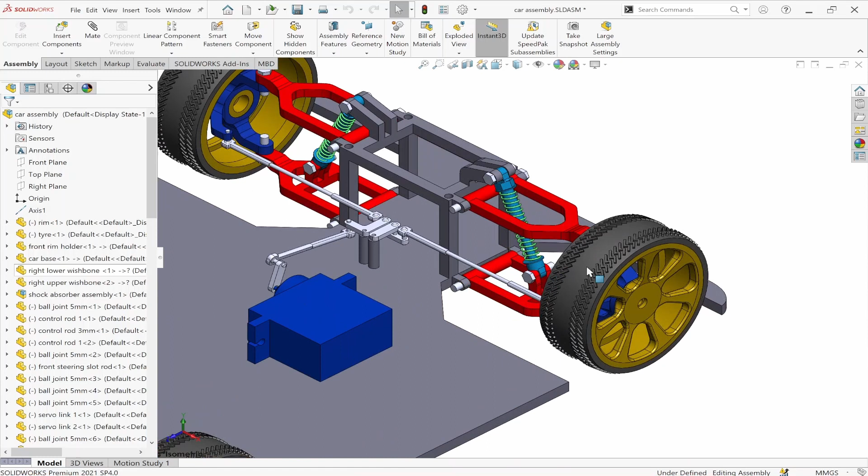In the previous video I showed how to make the tire, the rim, and the front rim holder. Let me click this part, which I can find on the left side. I will select all the parts using this tool, then Ctrl-click this one, right click, and hide all other parts.

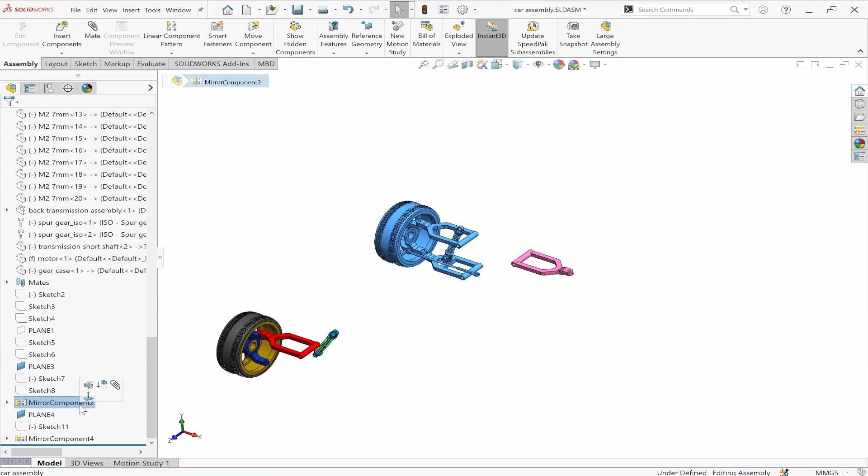Let me go one more time. Right upper wishbone, right click, hide component. Okay, so these are some mirror components. Let it be—we'll look at the geometry of this one.

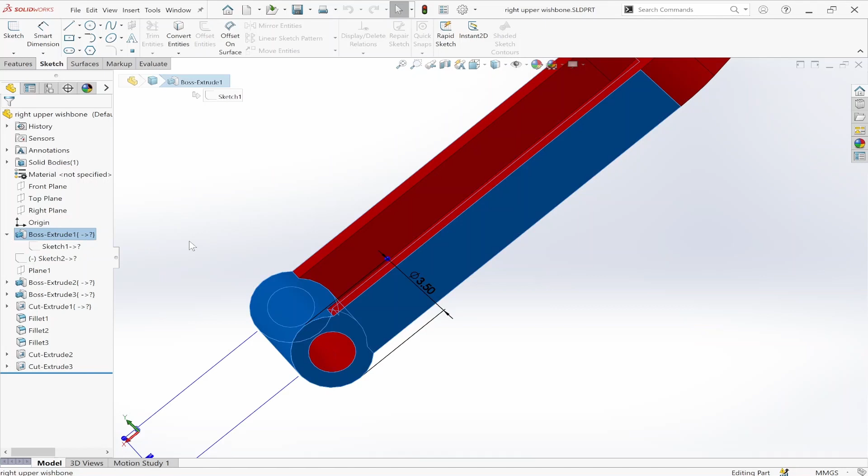I will open this part. As you can see, the first part is the sketch, made 3.5 millimeters, then boss extruded with 16 millimeters. Then I made a reference sketch again of the height I wanted, because from the bottom I wanted to check how it would look when attached to the front rim holder.

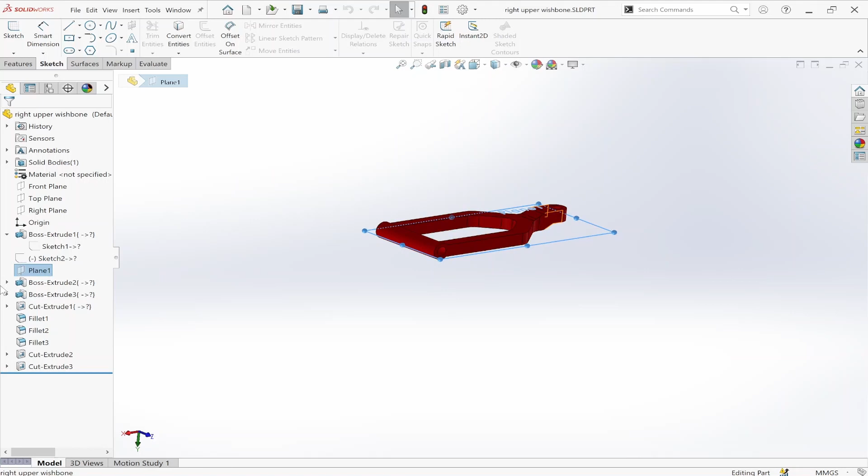And then I created a plane because I wanted to make the boss extrude for the skeleton. You can see I drew the sketch in this one.

Let's go to the sketch. You can see this is the sketch and these are the dimensions. I made a rectangle and then added an offset, how much offset I wanted—the offset is 2.5 millimeters.

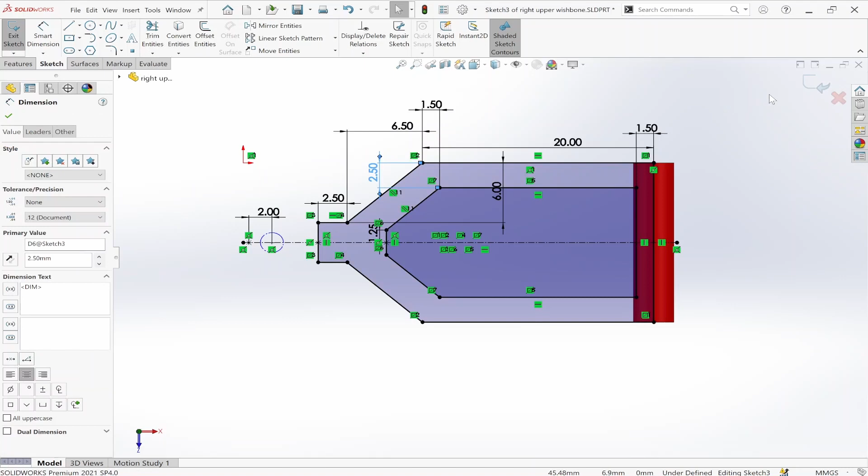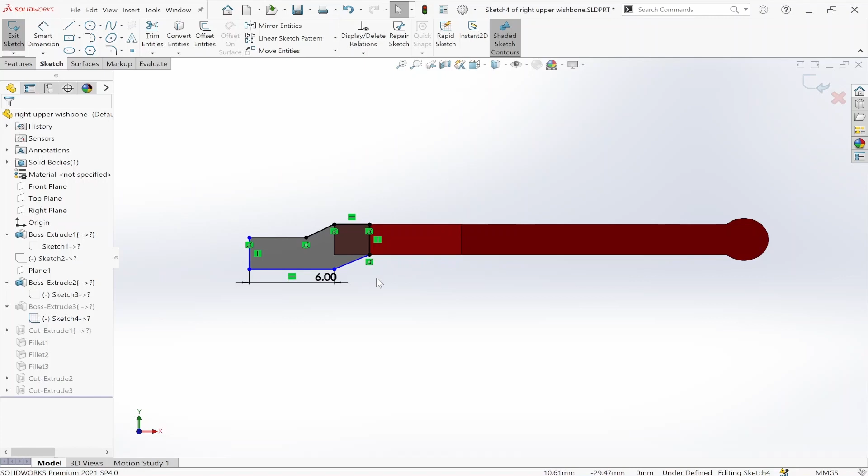Then I made another sketch, trying to merge this line with the front rim holder, because as I told you, we can make the assembly in two different aspects. So using the reference from the front rim holder, I tried to get the coincident point in the front rim holder, and then boss extruded it.

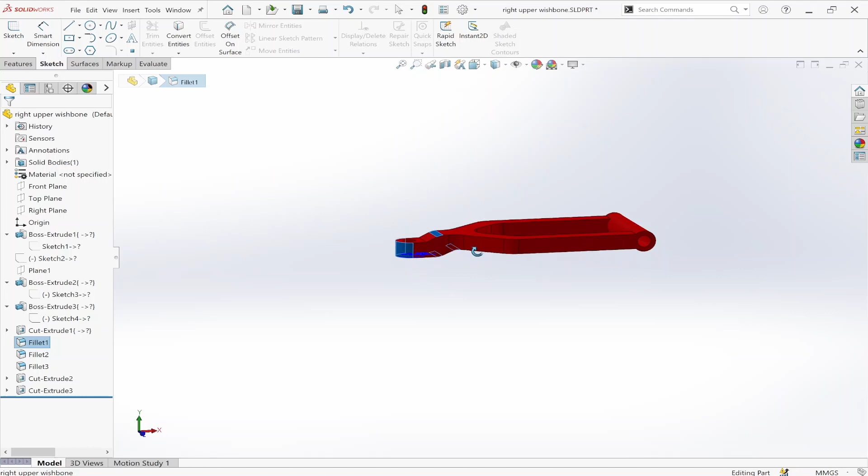Then I added some cut extrude because here I will add M2 screws, and then I made some fillets to make the shape look better. And then again the cut extrude—you can see it here, with 2 millimeters.

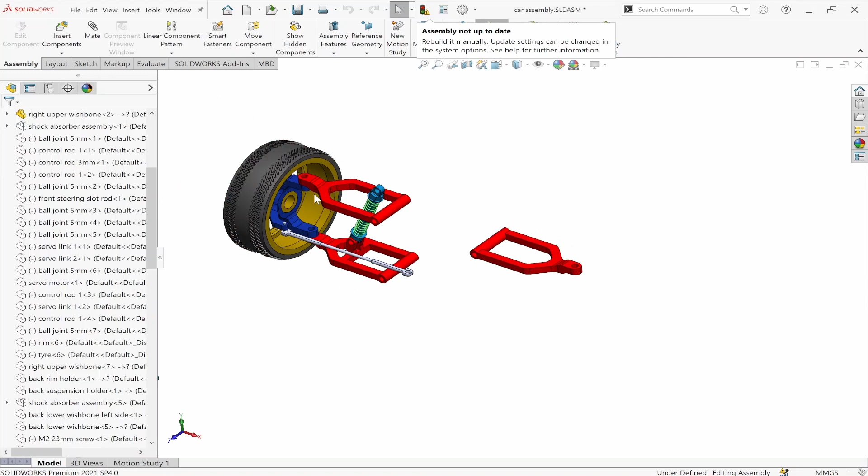Okay, so again I press Ctrl+S and go to the assembly. I don't want to change it. If you see here, this is what I was trying to tell you—this part has to get some inclination so as to properly align in the hole of this M2 screw hole.

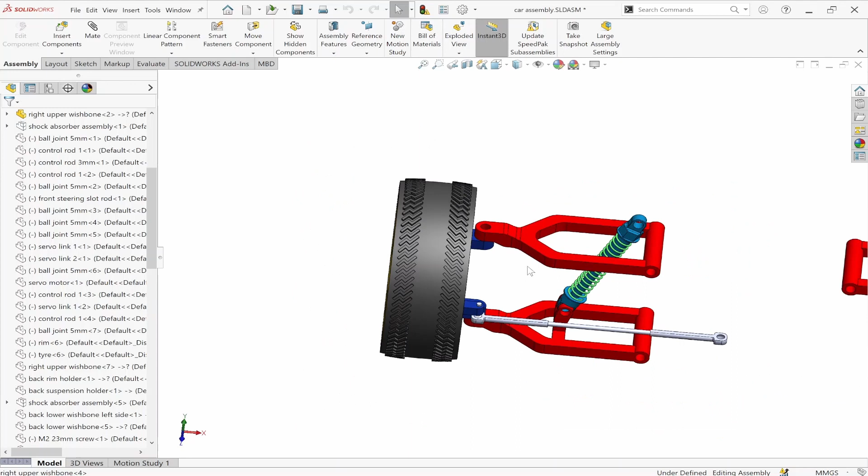So that's about our top front wishbone, and now let's get to the bottom front wishbone. I will hide this part. Let me show all the parts, then I will gradually close everything.

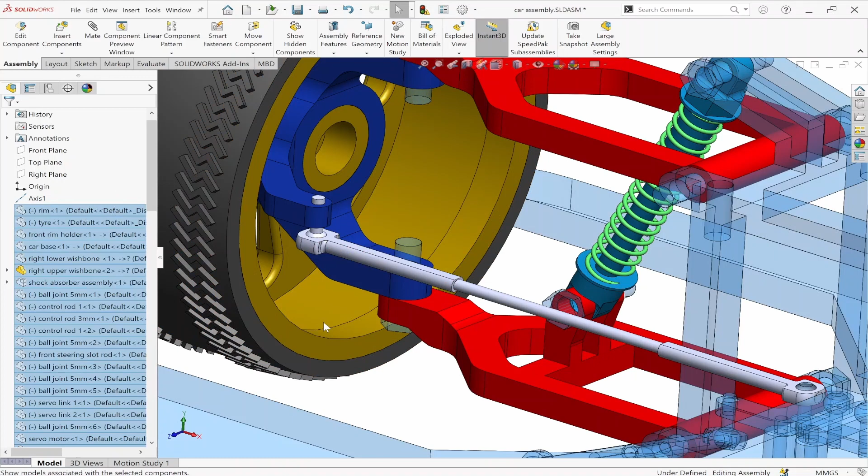Show components—I'm trying to show all the components because the parts I designed are on the right side, so I just mirrored it. The parts which are symmetrical, like the wishbones and the tires, are exactly symmetrical, so I just mirrored this component to the left side.

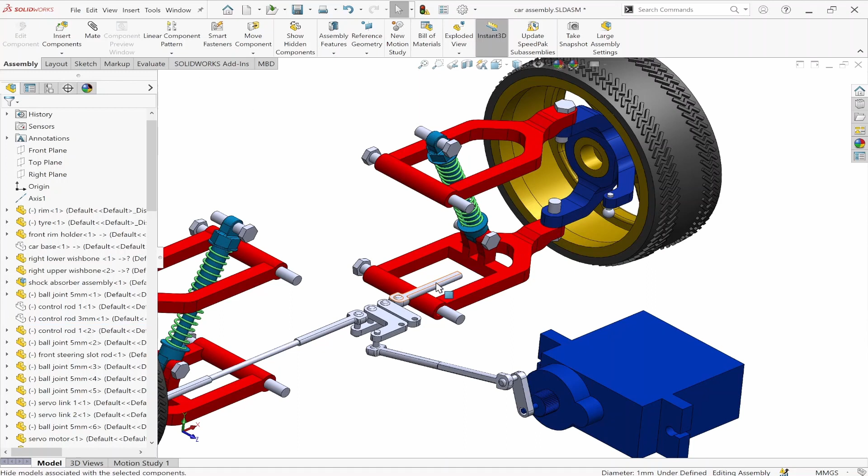I will hide this part. I will hide this part too—I'm just trying to hide these so we can see more clearly how the parts are made. So quickly, what I did: I tried to mirror the component.

I mean, I just tried to copy the component—sorry, not mirror, copy the component—and then I changed the name from right upper wishbone to right lower wishbone. Now if I edit this part, as you can see...

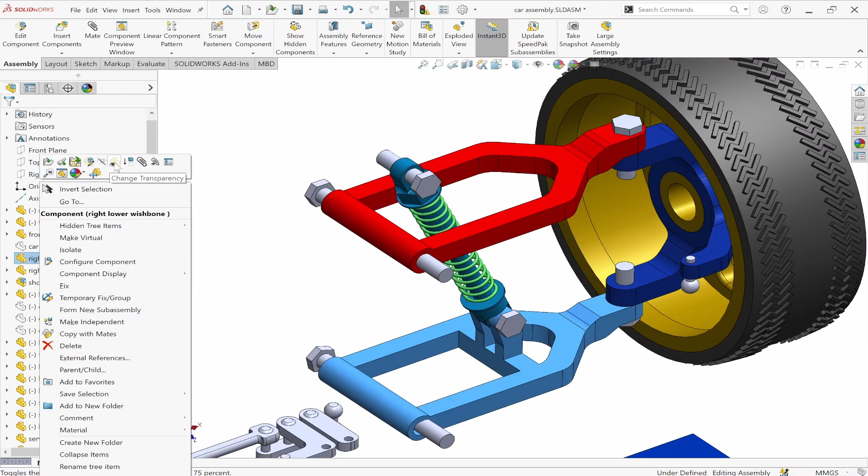Because we have 2 holes here and 2 holes here, we need to insert a bar which will connect the shock absorber spring, which is not present in the top wishbone. So I tried to make a geometry for this—this is the one I was telling you about.

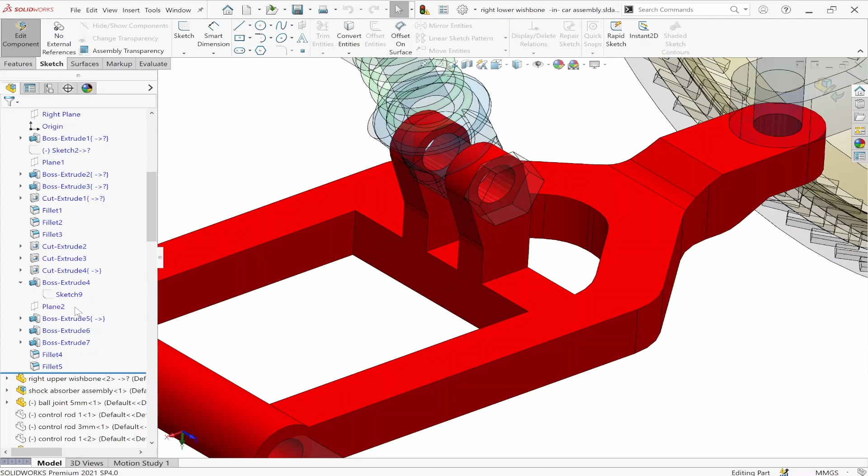I added a 2.5 millimeter square and then boss extruded until the blue face, then created a center plane. If we want to make a plane, we select this face and this face, and click reference plane to get the center plane exactly halfway between the two faces.

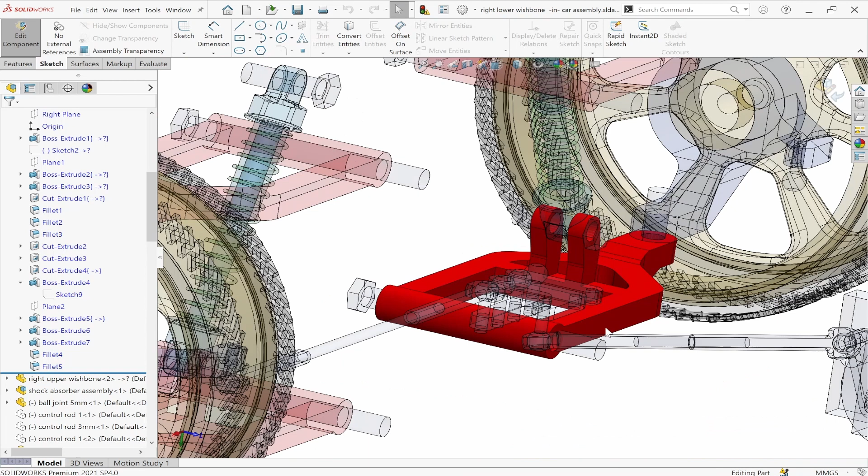Then I tried to make this sketch. You can see I made these two sketches using 1.5 millimeters of thickness, and the boss extrusion is around here. The next boss extrude uses this sketch.

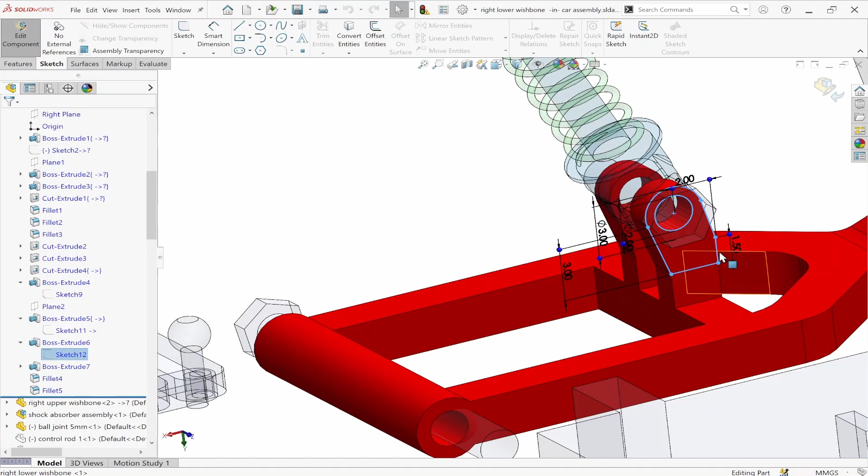I tried to make the sketch on this face, and then extruded up to a thickness of 1.5 millimeters, because this is the hole where we will put the M2 screws to fit the shock absorber.

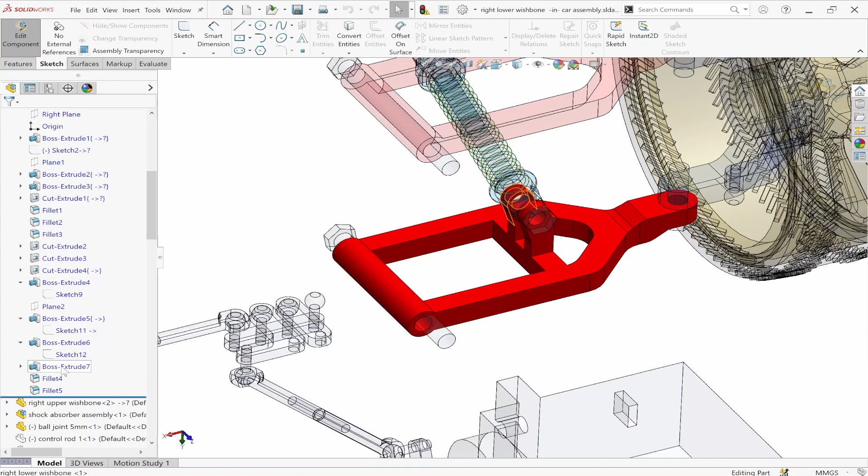Then I made another boss extrude here—I could have used a mirror, but I used convert entities and boss extruded here instead. Then I added some fillets here and here. That's all—this looked pretty simple, and now we are ready with the top wishbone and the bottom wishbone.

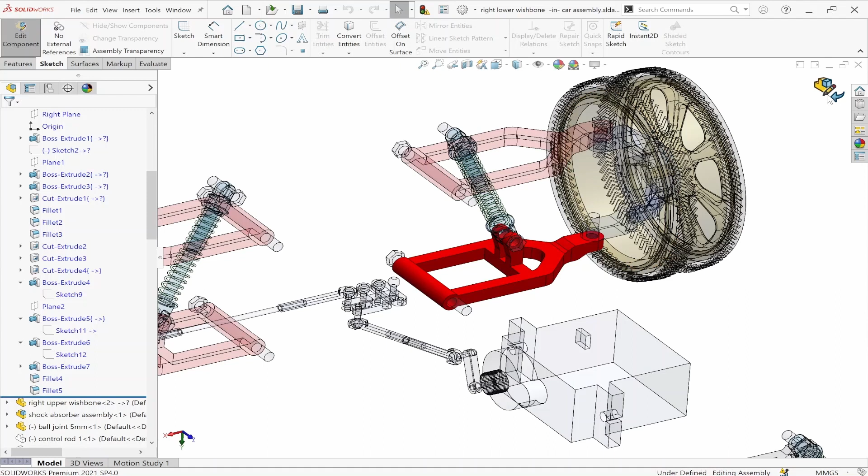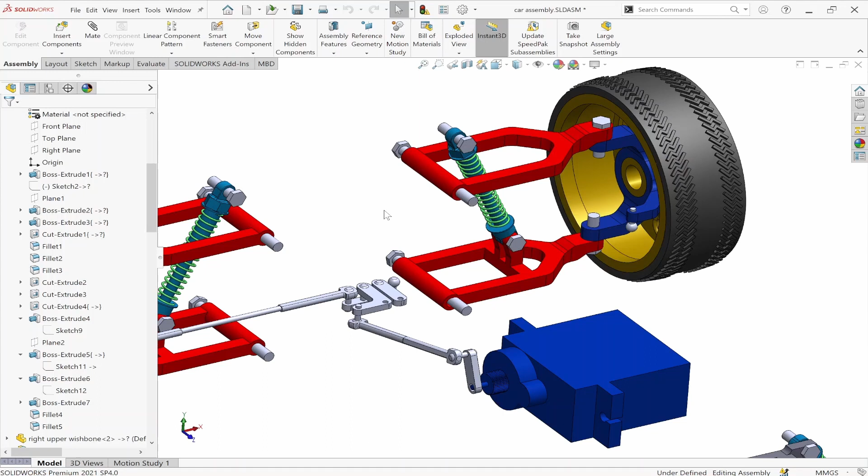So far what we have done is to make the tire, the rim, the front rim holder, and then the top wishbone and the bottom wishbone. This looked pretty simple. By this itself you can easily understand that we are getting into some action, and we can do something more in the design.

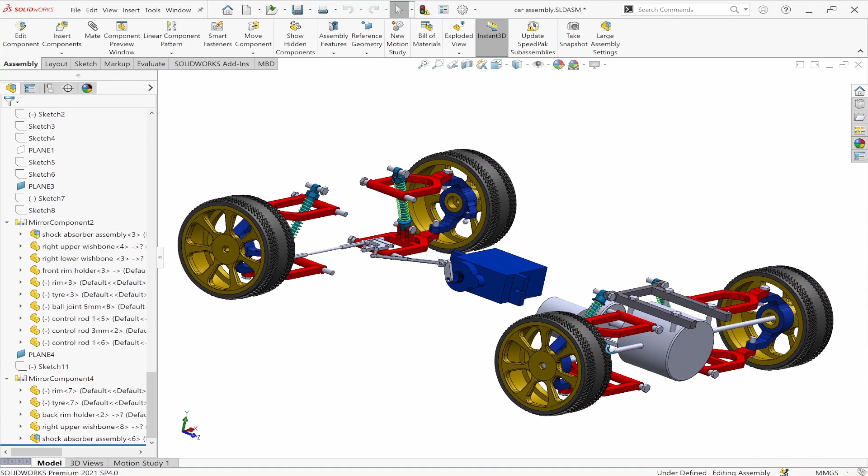If you see, the front wishbone is the same as the wishbone here. To make it simple, I just copied from here to here, and again made a mirror on this face. So I will quickly cover the backside of the wishbone.

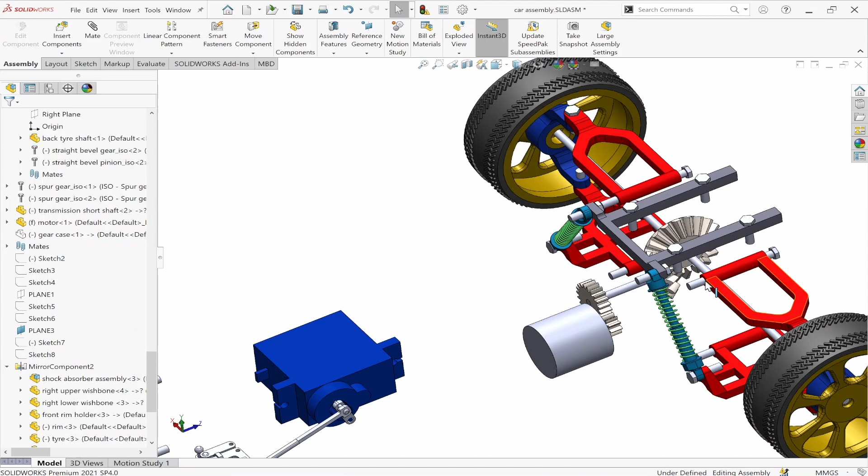If you see here, this spring is outside of the wishbone because there is a drive shaft. This drive shaft will try to rotate the tire, using the driving force created from the gearbox which I put here. I don't want to show you the gearbox, but the motor will try to rotate the big gear, and the big gear will rotate the bevel gear, which will change the axis of rotation to 90 degrees. Then this shaft will rotate as a drive shaft, creating the rotary motion in the car.

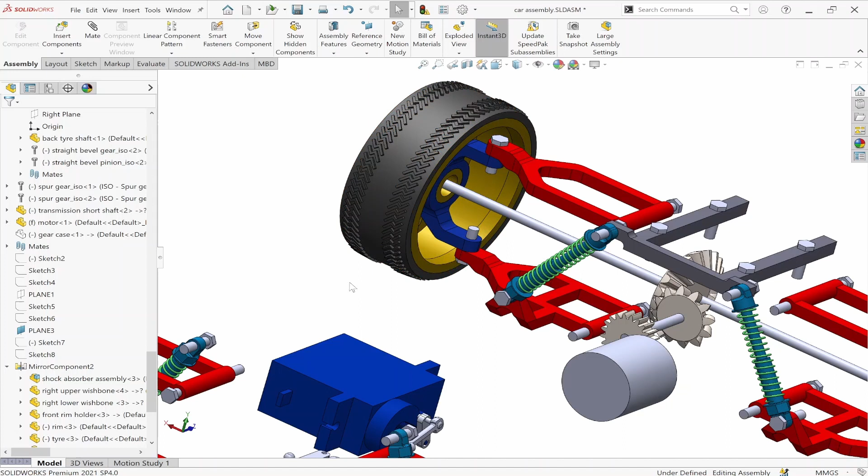The wishbones on the top side are the same, and the back rim holder is the same geometry. The front rim holder, I just copied, and instead of adding the steering rod extrusion, I edit this part.

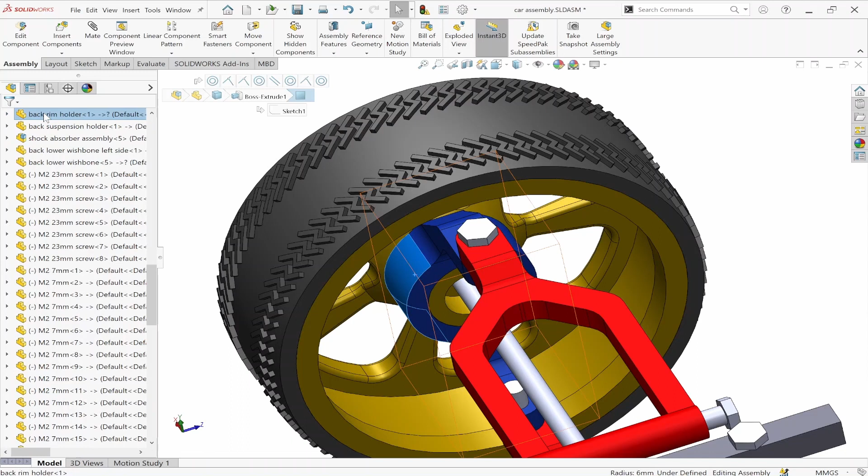Back rim holder, cut extrude. Instead of adding any other things, if I show you on the front side, you will get to see better.

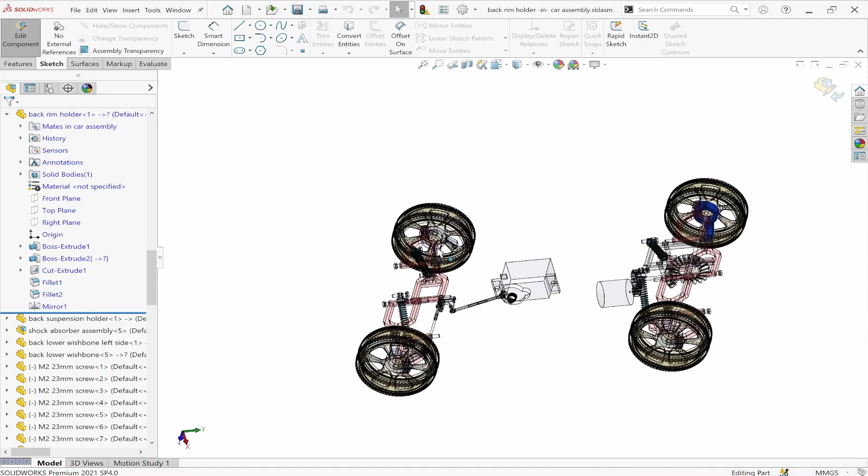Sorry for the slow processing in my computer. The face which I am selecting is the steering rod which will be used to steer the tire. I just deleted this part from here on the back side.

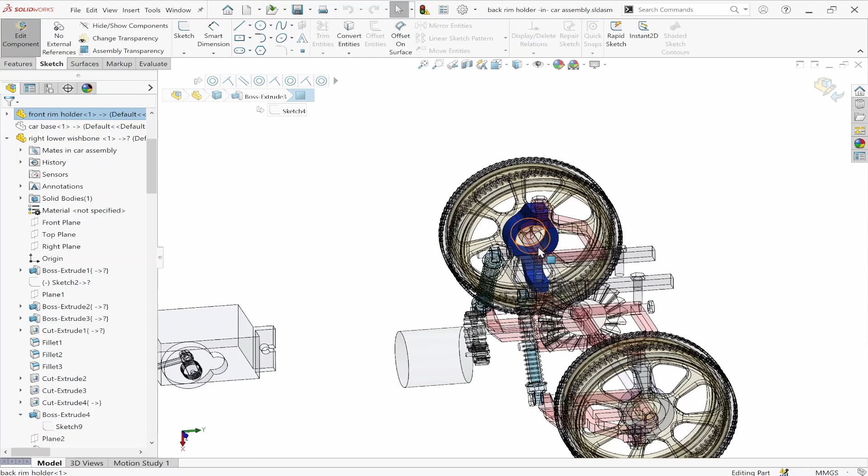So you can save time doing it like this, since it is almost the same, and it will help you achieve the same function. So I just use the same part, and now come to the bottom wishbone.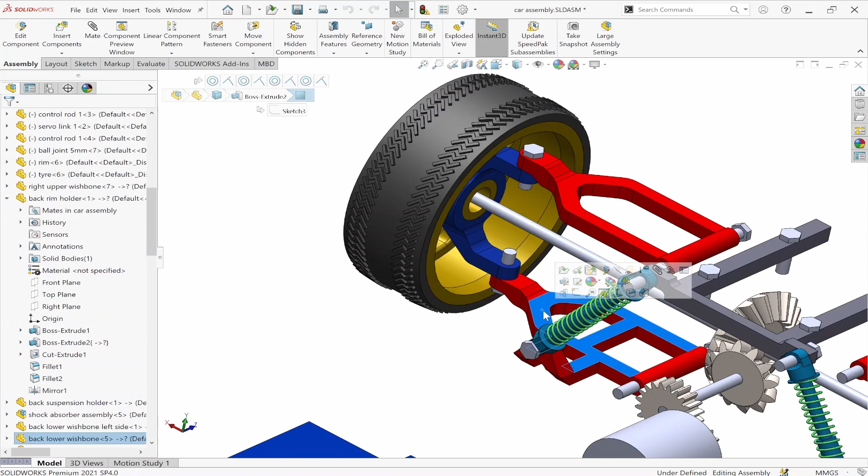Again, I use the same wishbone as the bottom one on the front side. Instead, I deleted the structure which was here. If you can see here, there are two extrusions, this one and this one.

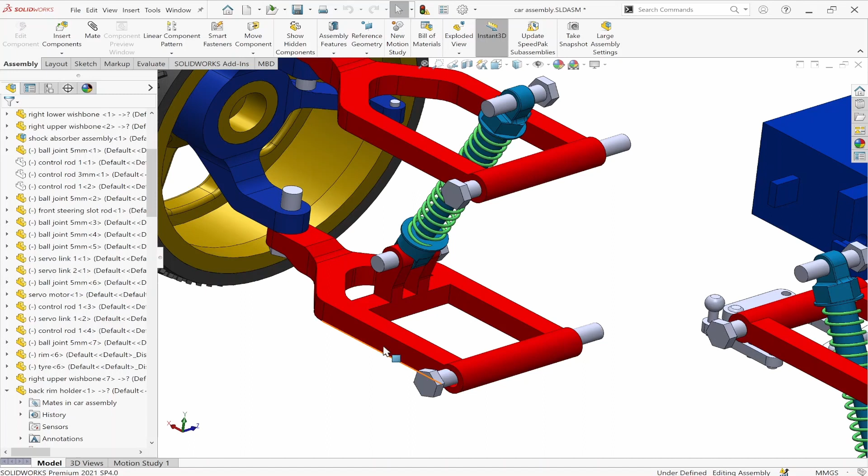I just deleted here and made a sketch on this face by extruding in the negative Z direction. You can see the axis here, this is the Z direction, so I pulled the extrusion in the negative Z direction. Something looking like this.

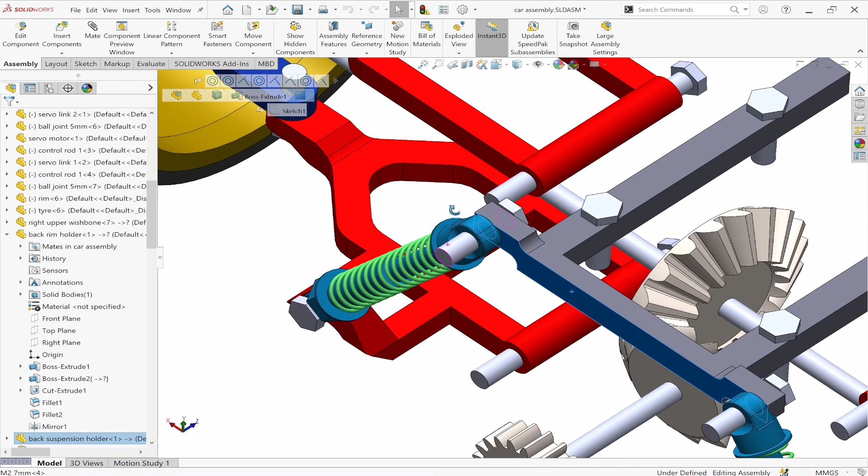So to support the shock absorber, I made a structure, this one. In the car base, I made some extrusion here, and then added the M2 screws to attach with the shock absorber.

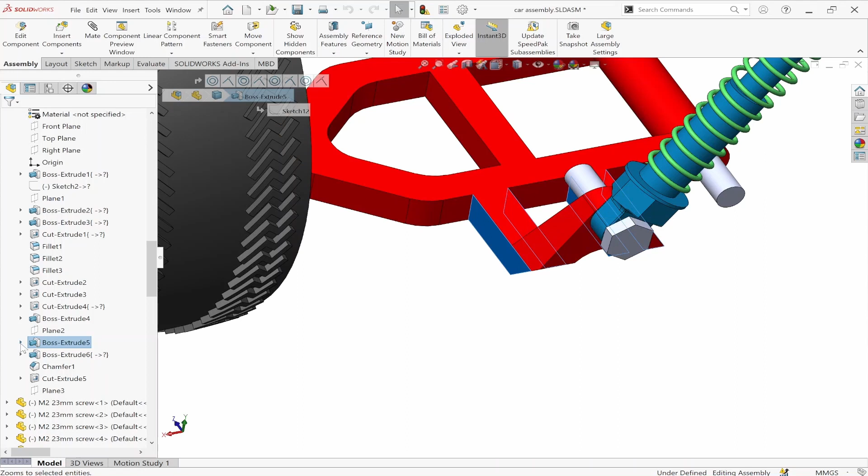Let's quickly go and check this part. I just go here. Okay, the boss extrusion here, let me edit this part. Right click, edit part. Boss extrude 5, and the sketch.

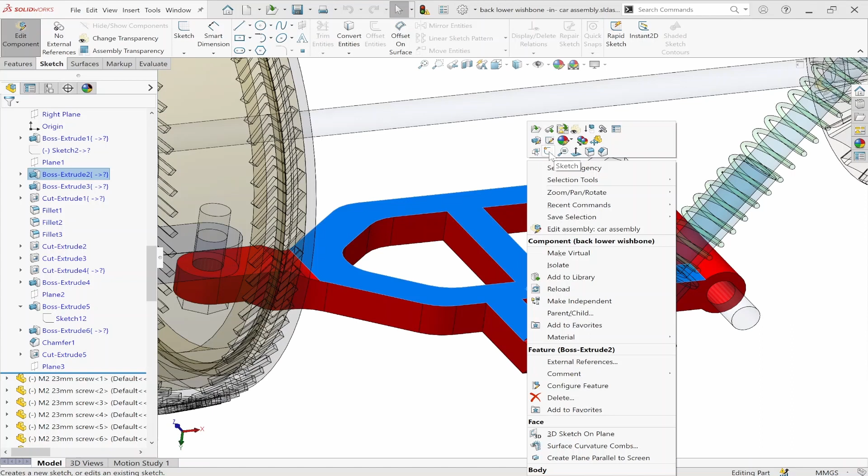You can see I made a sketch on the top face. Just right click, and you can start sketching using this option. These are the dimensions - I made some 6 millimeter gap and 6 millimeter in the length, and the gap between them is 4.5 millimeter.

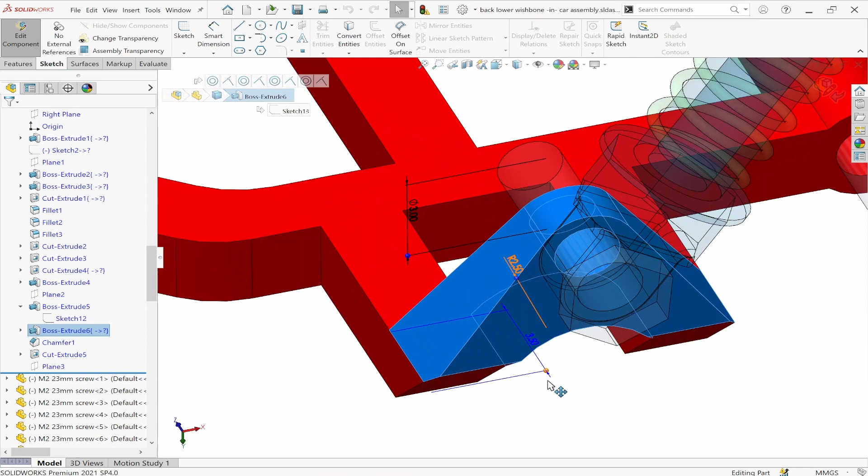Again, boss extrude. Zoom out. Yeah, pretty good. And this is the sketch, so you can see...

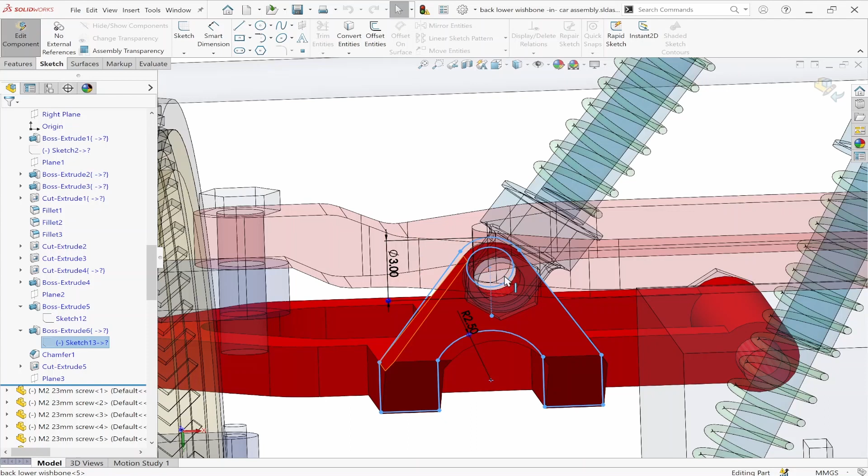I try to locate the shock absorber at an angle, maybe 30 or 35 degrees. So when I put the shock absorber in the alignment where I want the bottom wishbone holes to be, after that I just use the reference of this. You can see the circle, the inside circle, so I put it there, and then I boss extruded.

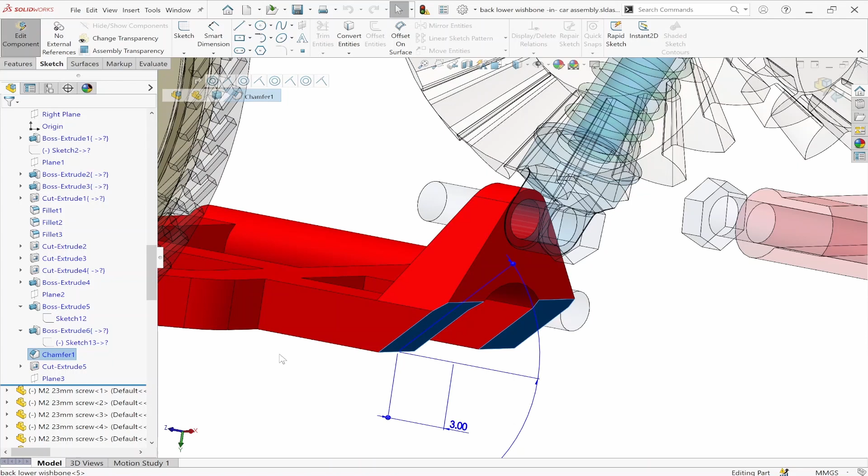Then I use a chamfer option to save some weight, because it has enough thickness, so we don't want much weight added to the bottom wishbone. And then cut extrude to quickly cut inside this one.

So this is about the wishbone here. And I have used a trick, because in the right side - sorry, this is the right side - and if you see the left side, I want to mention this so it will make sense.

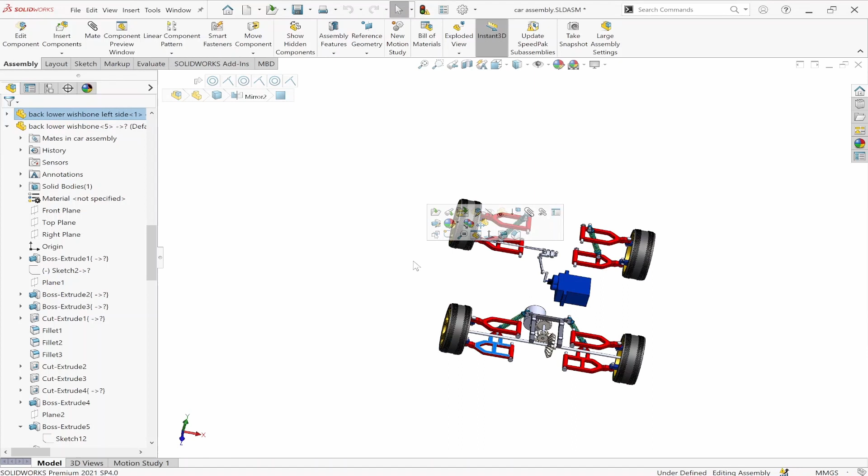So this is the right side one which I have drawn, and if I want to make the left side one, what I will do is just open this part - sorry, not edit, open the part.

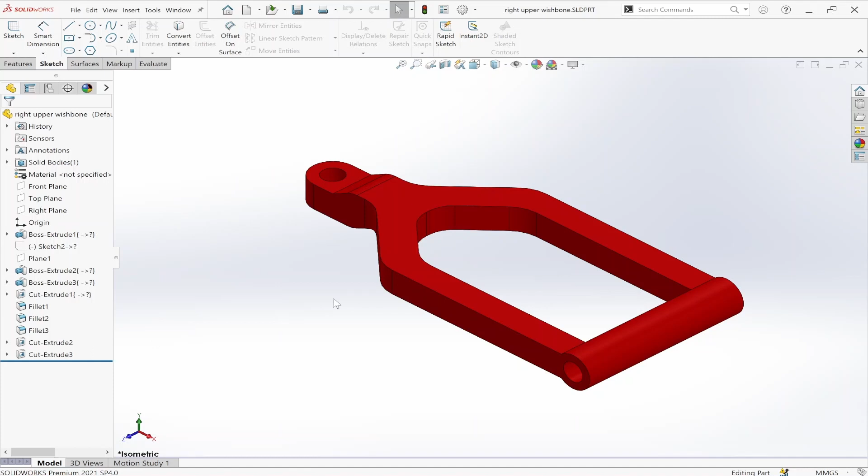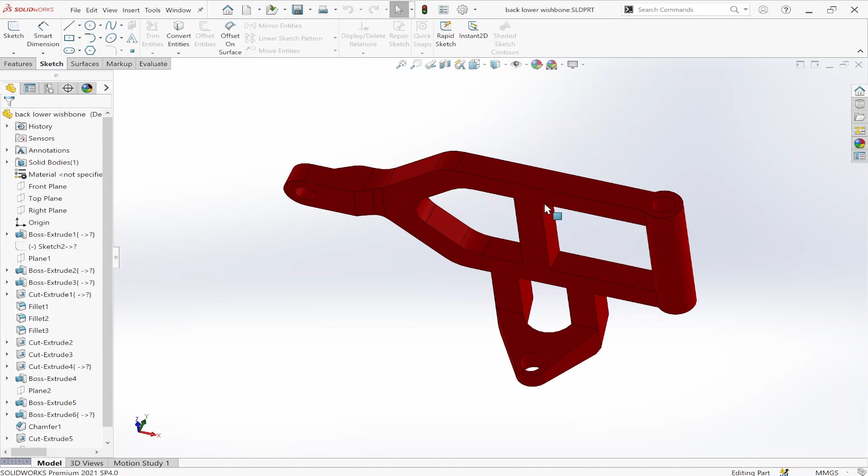I want to open this part, so I understand. Yeah, it should be this part because it is aligned properly. Control 8, or you can just rotate the view.

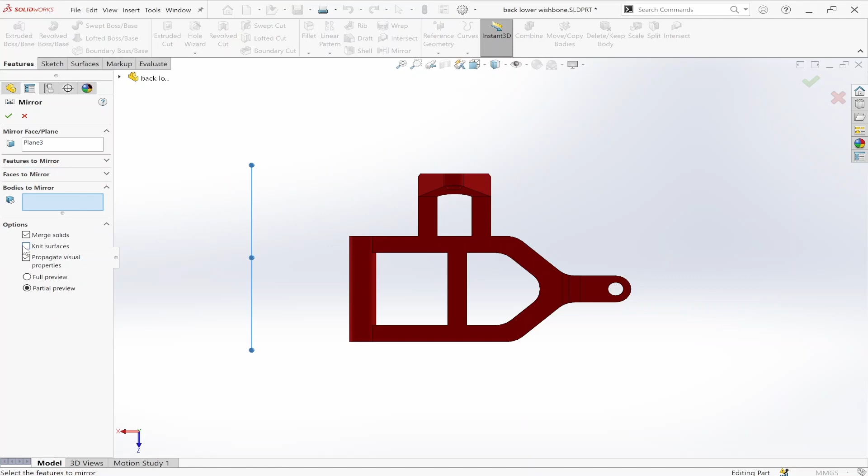You just need to make a plane a little bit far from this part, and then you can mirror the body from here to here. I'll just show you. Mirror, go to bodies to mirror, and click this one. You can see you don't need to design another new part, you just mirror it and click OK. You don't need to merge solids, untick this one, click OK, then you can hide this part, so you are ready with the left side part.

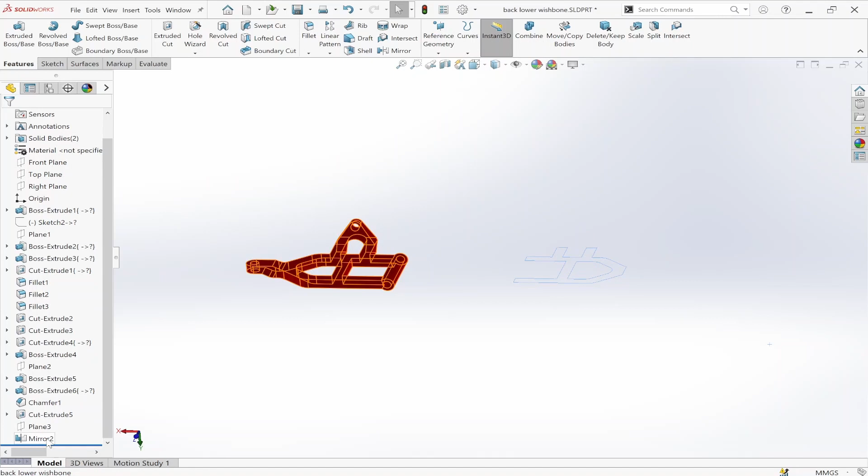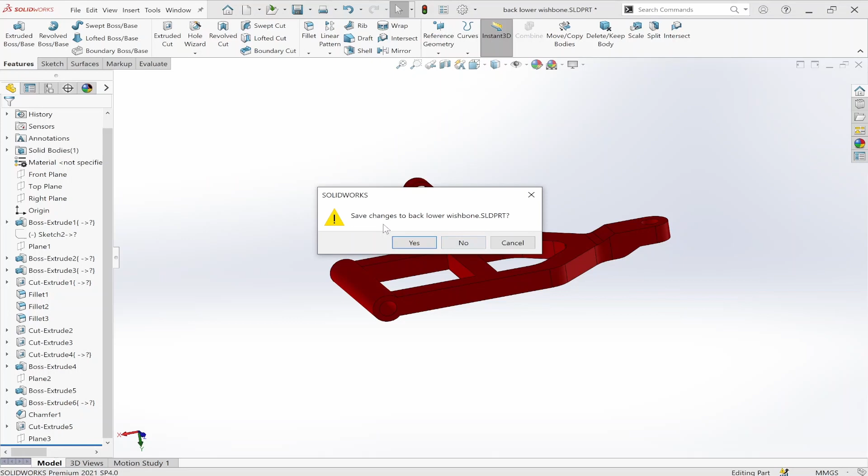Okay, so I already did this part in my assembly, so I don't need this one. I'll just show this part, and I can see all my right side bottom wishbone on the backside tire. So I think it's good enough, close. I don't want to change anything. Discard changes in assembly.

Okay, so this is pretty good, and this is how we make a simple, not fancy, wishbone - just a simple wishbone for some simple use, simple RC car design. You can use these parts to 3D print, and then try to innovate something inside the design.

Okay, now let's go to the shock absorber. You can see the shock absorber I have used the top side, the bottom side face, and then the spring. So I will click this one. Okay, shock absorber assembly, I will open the sub assembly.

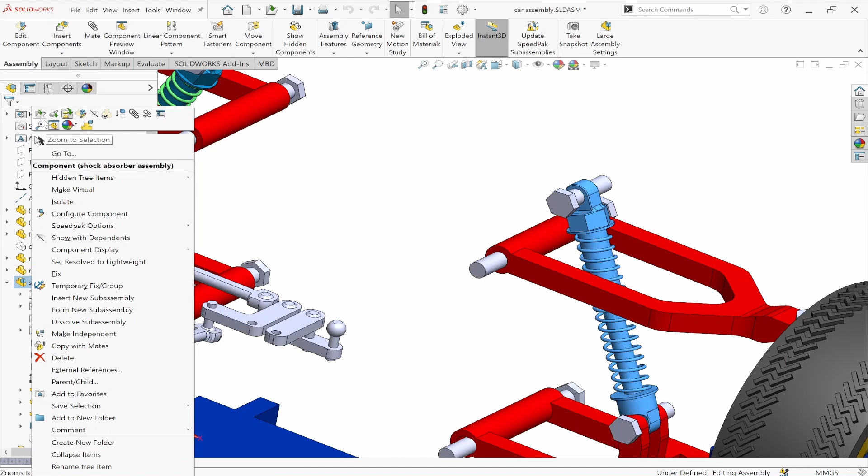Yeah, you can see this is looking nice. I will hide the spring. Okay, you can see the spring is moving, right? I will just press Ctrl Z.

This one I'm calling spring top, this part, and this is the spring bottom, which will absorb the shock from the tires' movement, because if it is going at high speed, it will definitely have vibration, and this shock absorber will absorb the vibrations.

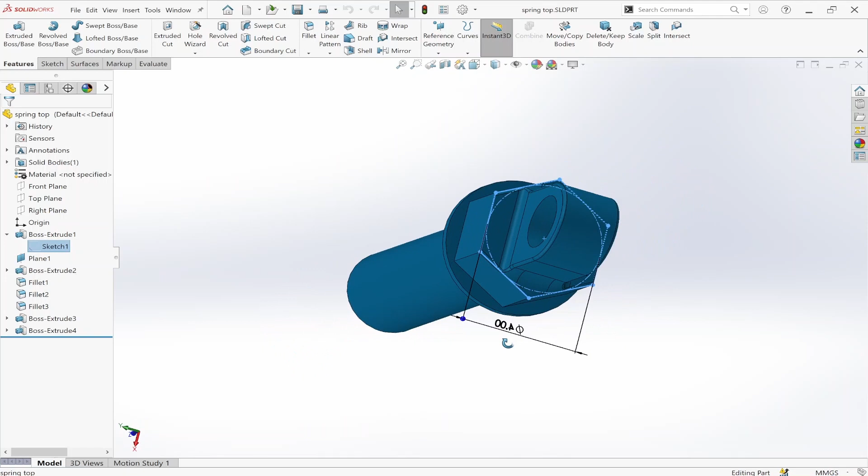Okay, open part. Control 7. The first thing I did was make a 4 millimeter size hexagon. So where can we get the hexagon? We just need to go here, polygon, and select 6 sides, and then we get it.

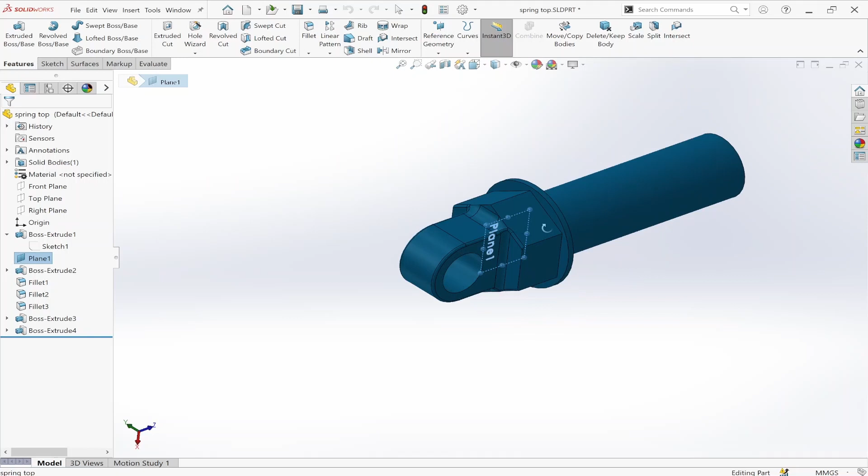Fine, and then I have created a center plane here. Quickly hide it. Then I made this sketch of 3 millimeter from here, and these are the dimensions. I have added a 2 millimeter diameter hole, because I want to keep all the screws similar, so we are just going to use M2 screws.

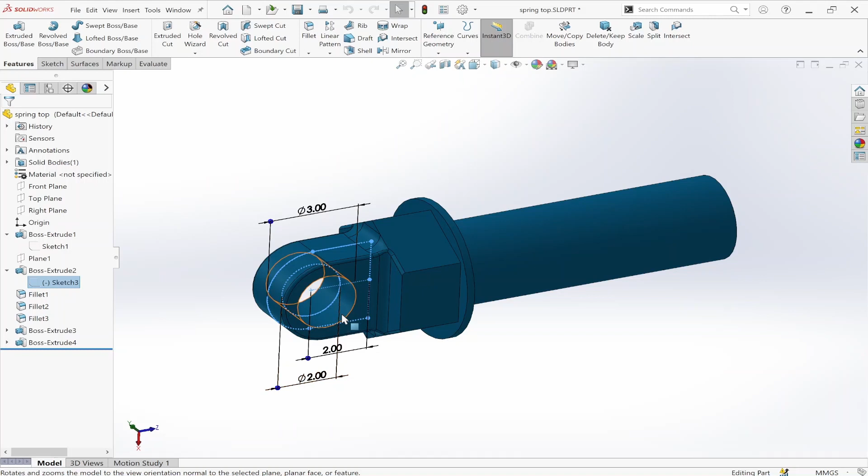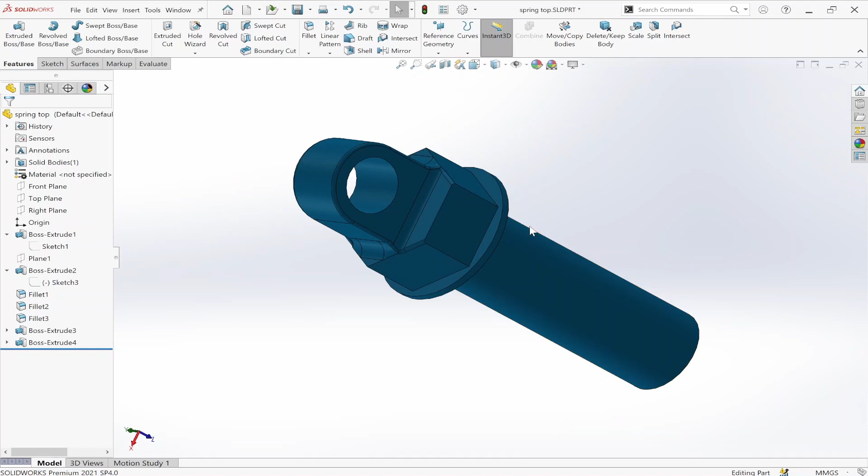Okay, and then boss extrude from the center. Then I added fillet here - you can see these two sides I added 0.5 millimeter radius, and here 0.25 millimeter radius on these two sides, and fillet 3 here is 0.10. To make it smooth, I just added some fillets, and boss extrude 3 here.

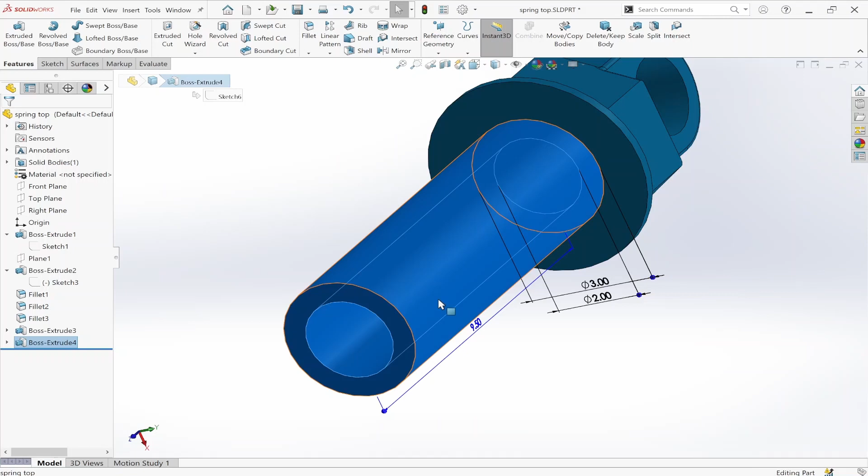This will be the stopper face of the spring, so it's just a circle with 5 millimeter diameter, and then the last one, 2 millimeter hole is the inside circle diameter, and 3 millimeter is the outside circle diameter. I extruded until 9.50 millimeter, because I know the dimension from the sub assembly. I don't want to change anything, discard changes.

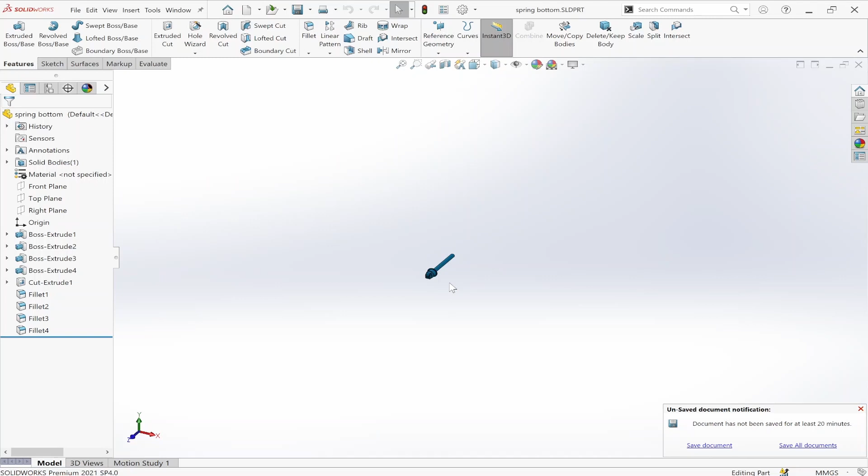Okay, and then the spring bottom. Control 7, and the boss extrude I just made 2 millimeter, because the hole I said was 2 millimeter, so this piston rod should be 2 millimeter diameter, and then I extruded 20 millimeter length, and then again 5 millimeter for the spring stopper face, so this will allow the spring to not come out of the face from here.

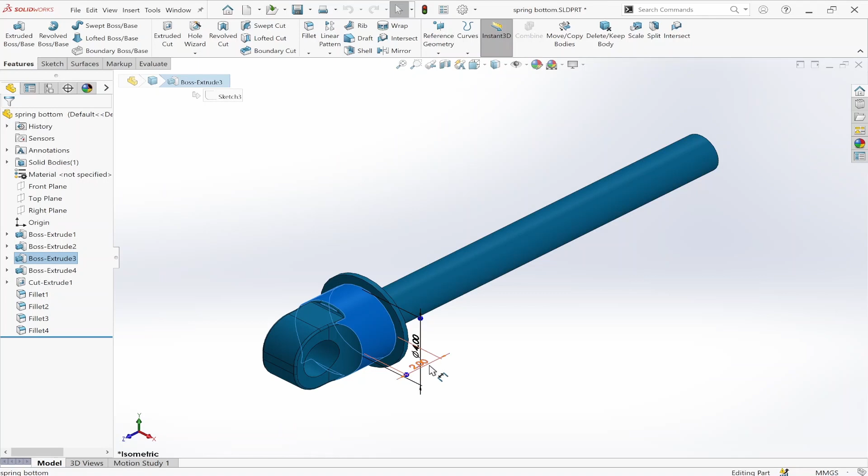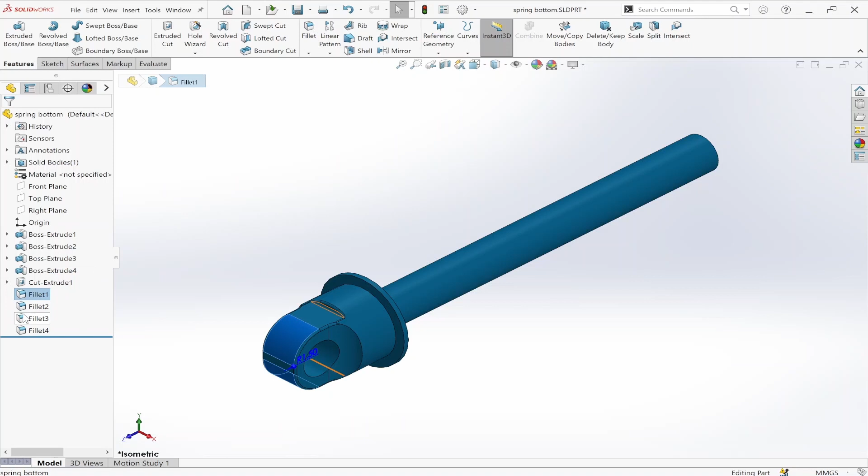And then again the 2 millimeter extrusion with 4 millimeter diameter circle, and then I quickly added 3 millimeter length with 2 millimeter circle inside, because we are going to use M2 screws. And then I added some fillets, pretty easy, right? Again the same fillet sizes, 0.5, 0.25, 1, and 0.10. Okay fine, I click Control 7. I don't want to change anything, discard changes in assembly.

Yeah, so this looks nice, and now we have to add a spring. Let me show you the spring. I just open the spring.

Control 7. Okay, so the first one I need to create a spring up to what distance I want. My sketch, I want the diameter to be 3.50.

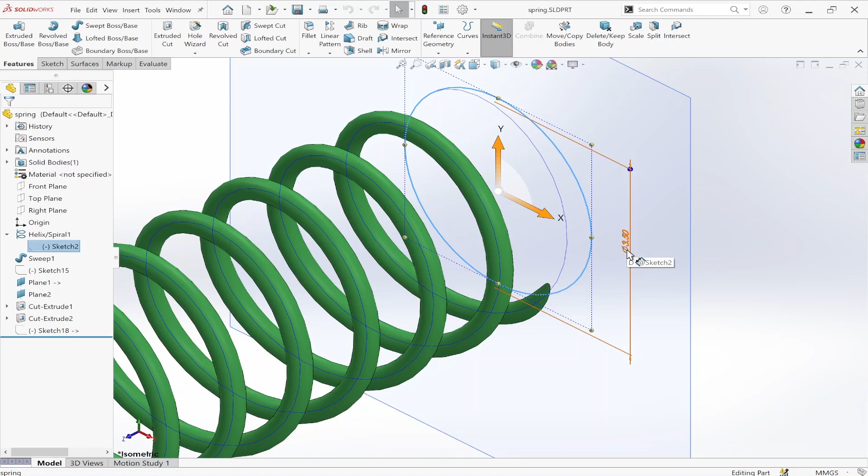So how can I make a spiral design? I will quickly show. On the front plane I just click and make a random sketch here, and then I'm going to make a spiral shape from here.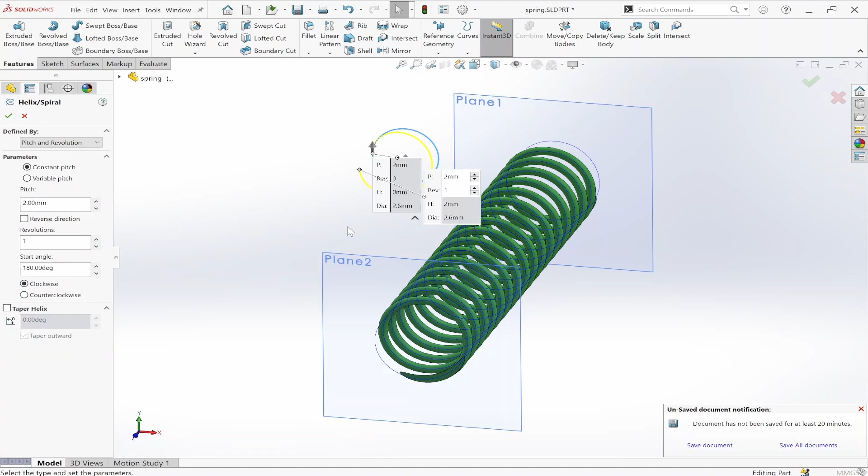Curves, I'm going to features, and then curves, helix and spiral. So it will ask me how many revolutions I want.

So I'm just choosing constant pitch. My pitch is 2 millimeter. My revolutions is, for example, 10. So my distance, what I'm getting, is around 20 millimeter, right?

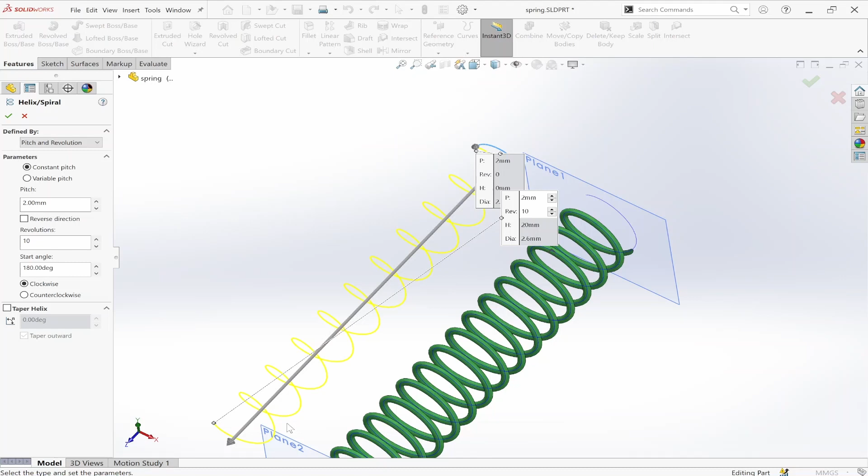Because pitch into the revolution will give us the height. Yeah, and we can get the 20 millimeter. We can select based on what size we want. So this is how I can generate a spiral. Yeah, it is pretty simple, right?

So I will just quickly delete this one and this sketch 2. Once I'm done with the helix spiral, then I want to sweep.

So for sweep I just edit feature, go inside, and we can select circular profile. Circular profile, it will ask us what's the diameter. So I just selected 0.35 millimeter, and the direction which I choose is the helix spiral path.

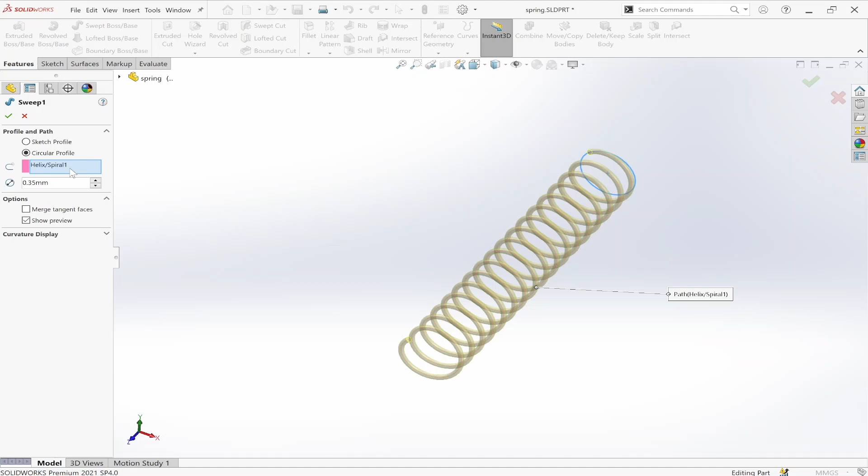Yeah, so I just got this one, and let me hide this. I created two planes, because if you see...

Cut extrude, for example, if I suppress this one, okay, you can see there are some extra faces, right? I don't want this to be a circular face without any flat edge, so I created a flat plane, and I will unsuppress this one.

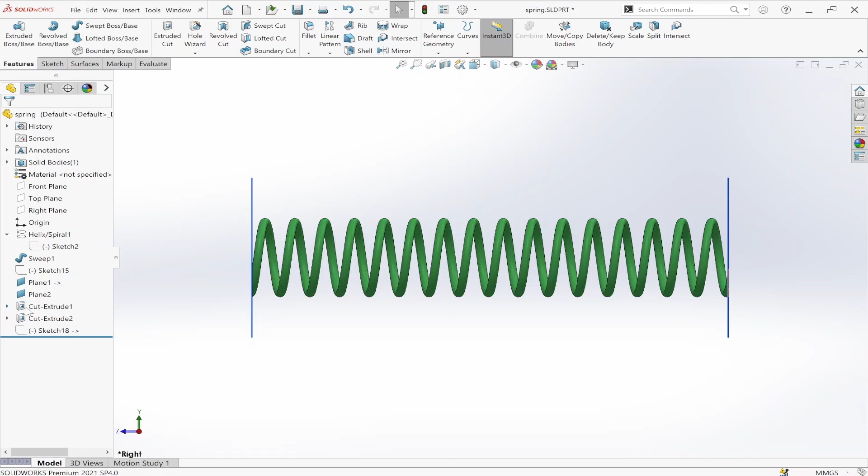If I go here, you can see I have made a circle which is much bigger than the spring size, and then I try to extrude cut it.

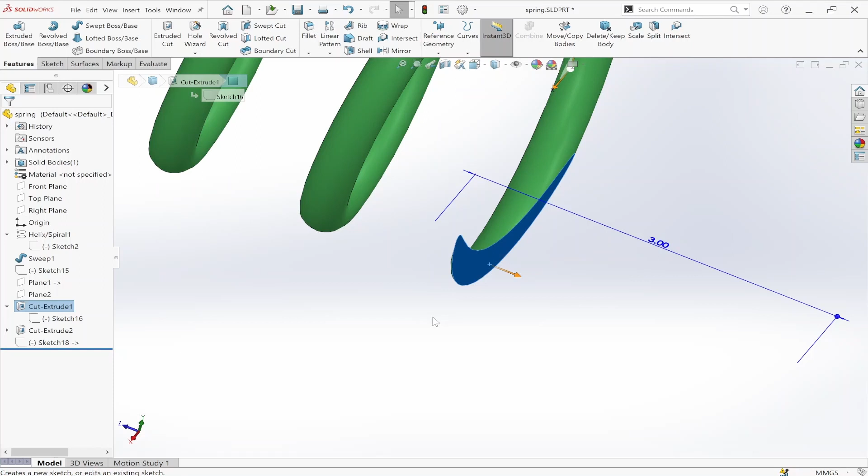Okay, yeah, now if you see, this face is flat face. So if you click here, you will also get the sketch option. So this means our face is entirely flat. Again, I did the same on this side too.

So this is all about the spring. I just save it. I don't want to change in the assembly now.

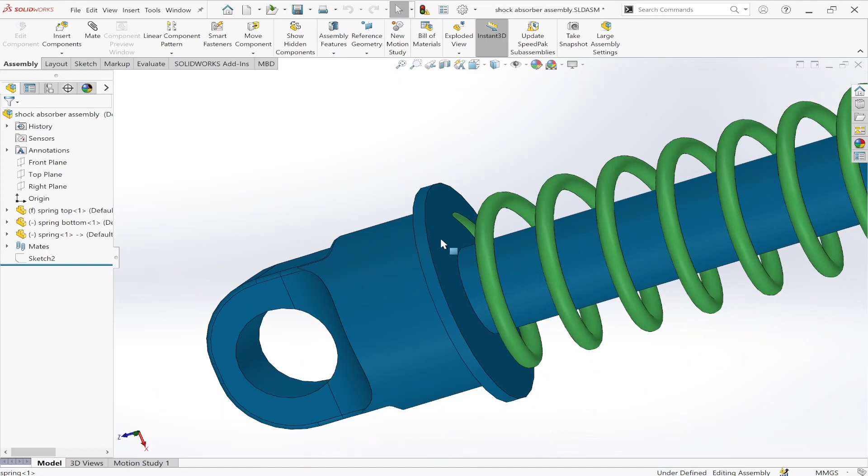So by this, what we can do is we can easily make the coincident mate on the face of the spring, I mean the spring stopper face. Yeah, so this is our shock absorber assembly. Looks pretty simple, right?

No, I don't want to change anything in my assembly. I just rebuild this one.

Yeah, okay. So now what we have done is we have seen how to make the wishbone on the top side, the front wishbone on the right side, front wishbone on the left side, backside wishbone on the top side on the right tire, backside wishbone on the top side again on the left side. So these four parts are the same, so if you just make one, you can make a copy of it.

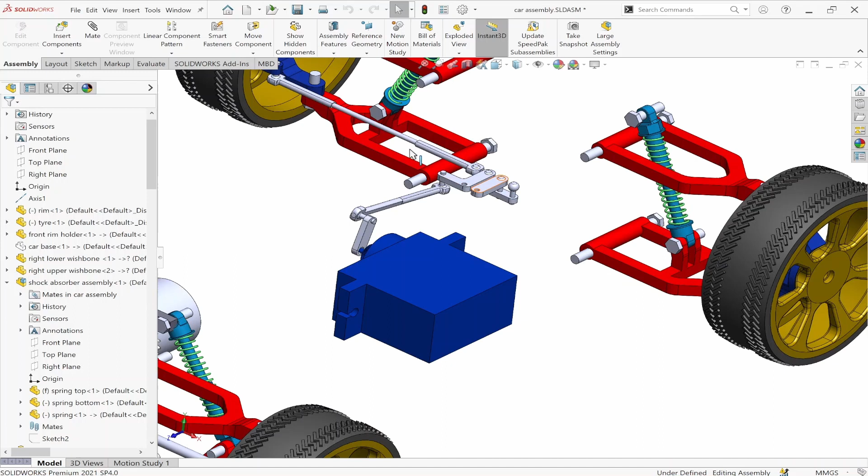And then next is the bottom wishbone on the front side on the right side, right tire. So this one also you can make and mirror this part, like I said on the back side for the left side. Otherwise you can just create a mirror of it, one mirror of this.

If you click... sorry, linear component, you can see mirror component, so you will get exactly the replica of this part. Okay, this will save your time.

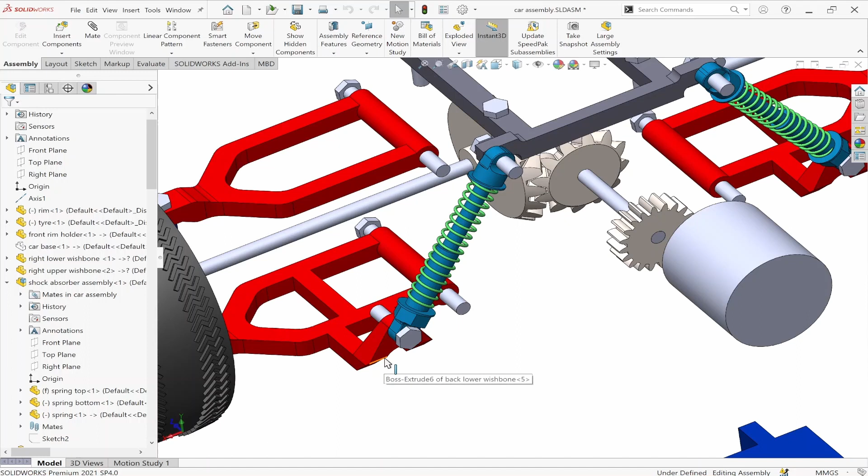And again on the back side we have seen how to make this part here. So you might be thinking how I adjusted the length and how I know the proper angle and everything. If I show you at the bottom side, you can see there are a lot of reference sketches which I have made.

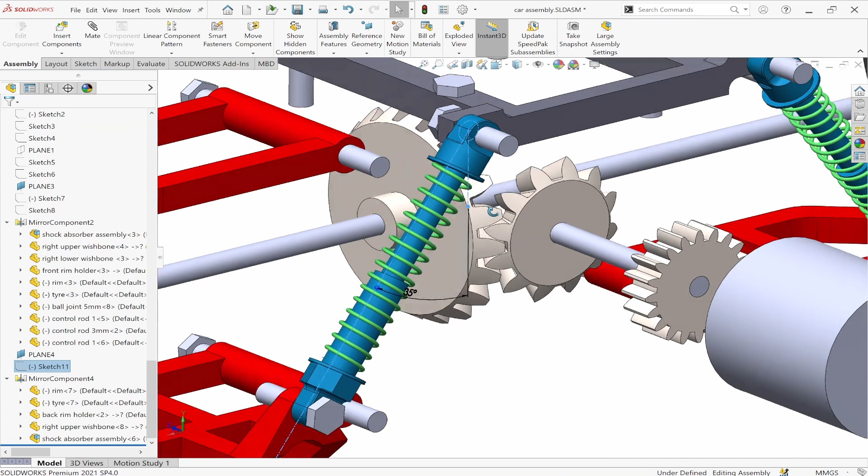Okay, yeah, for example this sketch I want to show here. I told you, right? This one is of 35 degree. So I just made a line of 35 degree, properly aligning on the backside of the wishbone, so that I know my suspension, I mean the shock absorber, will be exactly here.

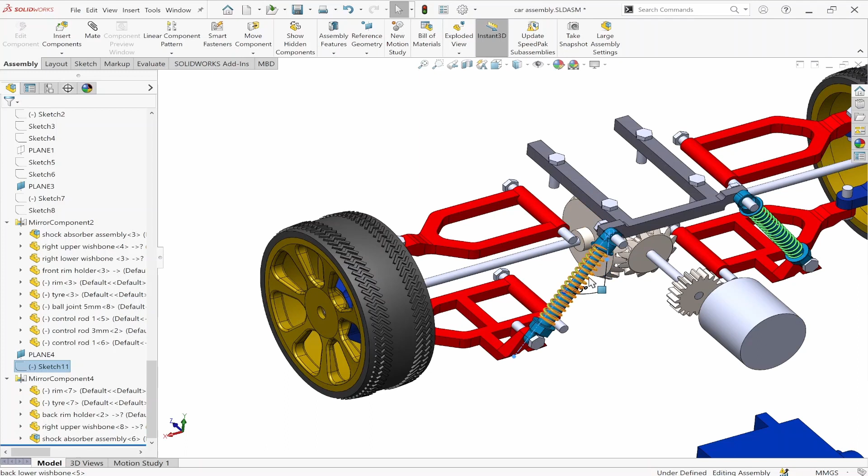So I just made the concentric mate with this shock absorber and then assembled here. So this one helped me, the reference sketches. These are very, very important when you make the assembly. It will really help you to properly align the parts.

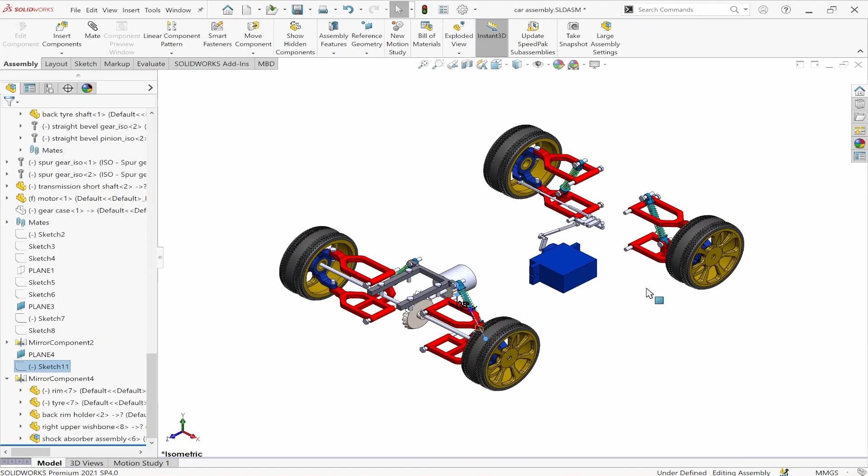Okay, so this is all about the tutorial today, and in the next video I will show you what other parts I have added and how I have made the steering part, the servo ball joints, and everything.